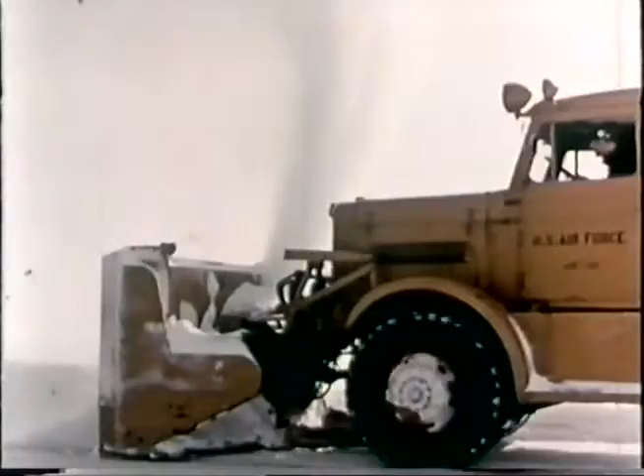Snow. Food for a poet, fun for children, but problems for the aviation industry. Snow falling on the ground at a temperature of 28 degrees or below will pack. Like any dry bulk, loose pack commodity, it can be easily disposed of by shoveling or sweeping. For this reason, the only problem this type of snow presents for airport operations is clearing of runways and terminal areas. However, as the temperature rises, the snow begins to melt.

propeller-driven aircraft have operated from slush-covered runways for years, observing only the necessary additional ground run and, of course, slush freezing in the gear or flaps. After becoming airborne, in an attempt to overcome this latter problem, pilots often recycle gear and flaps once or twice. The attendant problem of additional ground run has not been as acute.

In only one case has the failure of a prop-driven aircraft to attain takeoff velocity been directly traceable to slush, and that was when the slush was reported to be 5 inches deep on the runway. The ability of propeller-driven aircraft to deal with slush is due primarily to prop aircraft having a relatively high thrust-to-weight ratio, a low tire pressure, and a low takeoff speed.

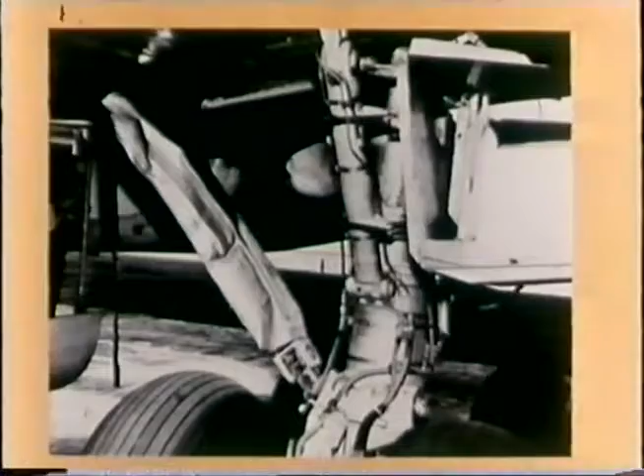The pressing problem is that this ability is unavailable in the operation of jet aircraft. Because a comparatively long ground run is necessary under normal conditions, any increase in the takeoff distance resulting from slush creates a serious problem. Due to an operational incident in March 1959 and evidence of damage to an airline jet transport operating in slush, the Federal Aviation Agency issued a rule that prohibited jet aircraft from taking off on runways with any measurable amount of slush.

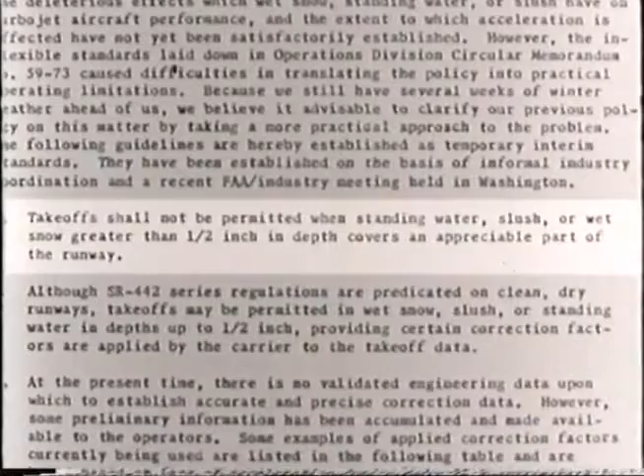A relaxation of this rule was not effected until the results of various tests conducted by the National Aeronautics and Space Administration's Research Center, Langley Field, Virginia, and by a prominent aircraft manufacturer were presented to FAA for consideration. Shortly thereafter, the FAA issued a new rule stating takeoff shall not be permitted when standing water, slush, or wet snow greater than 1/2 inch in depth covers an appreciable part of the runway. This rule is still in effect.

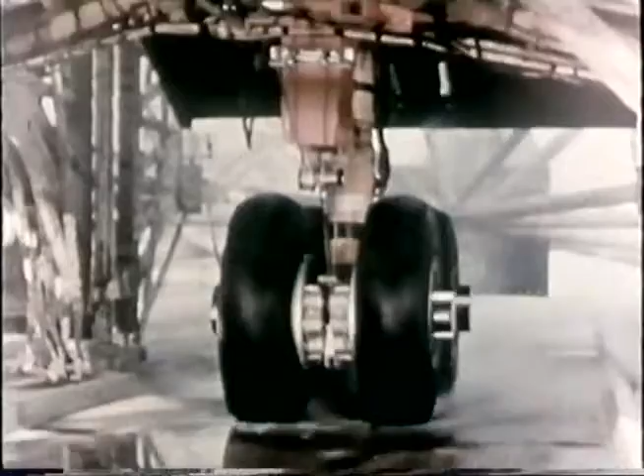Jet aircraft can be excellent revenue producers, but due to high initial cost and operational expenses, they represent a serious loss potential when grounded because of weather conditions. Researchers and engineers at NASA and elsewhere were busy experimenting in an attempt to work out go or no-go formulas for slush operation. These formulas were based on tire width, aircraft weight, slush depth, thrust-to-weight ratio, and takeoff velocities.

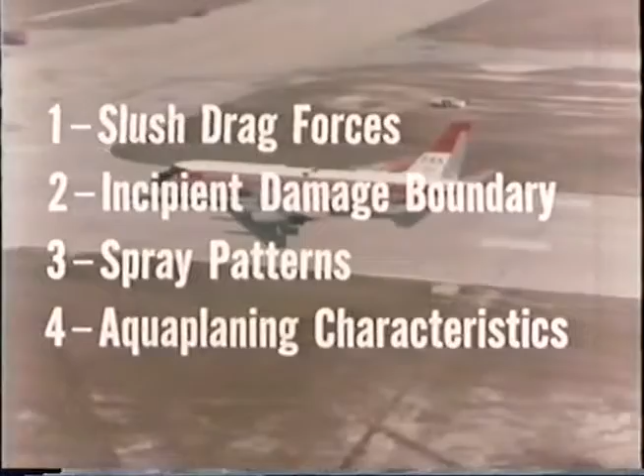What was needed now was a full-scale test program under which conditions could be controlled and measured accurately. The FAA's National Aviation Facilities Experimental Center, located at Atlantic City, New Jersey, was assigned this task. The program was designed to determine the following: slush drag forces, incipient damage boundary, spray patterns, aquaplaning characteristics, all in relation to aircraft velocity and slush depths.

It was felt desirable that a 4-engine jet aircraft, representative of the type being flown in current passenger service, be used in these tests. The program was started with the delivery of a Convair 880M to the FAA. Runway 13-31 was selected for laying test beds of slush 50 feet wide and from 1,000 to 3,000 feet long.

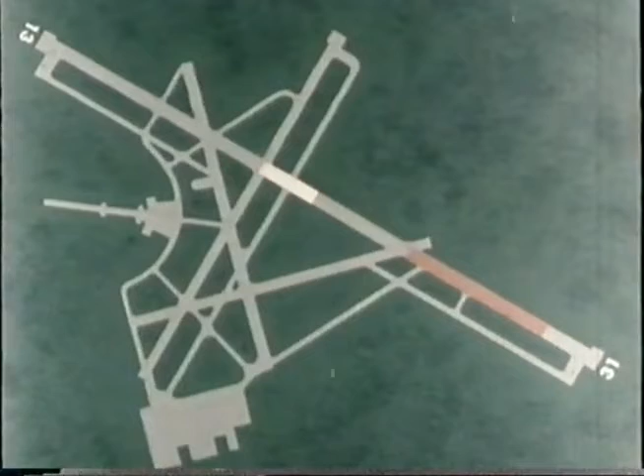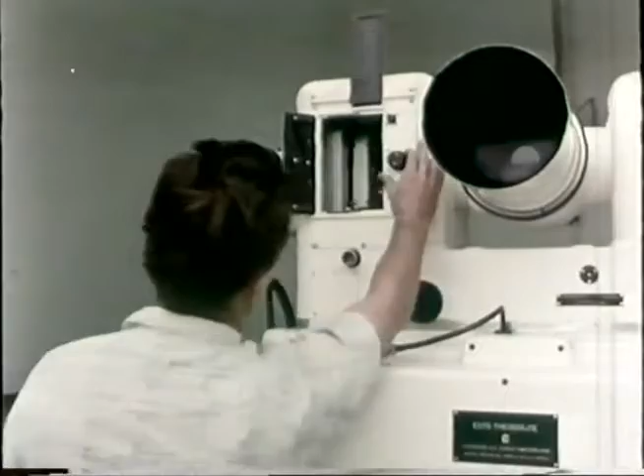This central location was selected to permit enough room for the test aircraft to accelerate, to have enough room for engine spin down to idle thrust, to allow sufficient distance for the aircraft to brake to a stop after exiting the test bed, or to be able to accelerate to a rotational velocity for takeoff. Primary measurements of aircraft position, velocity, positive and negative acceleration, and attitude were obtained by phototheodolite and accelerometer instrumentation.

The first test in slush was scheduled for late September. Ice was delivered to the runway site in the early morning hours in huge insulated trucks.

The amount of ice required for the entire project was 2,300 tons, enough to lay end to end a solid lane of 300-pound cakes 12 miles long. The cost seemed expensive, over $50,000, but not if one considers that the washout of one jet aircraft amounts to $5 million.

While the leveling operations were being conducted on the test bed, preparations were begun on the 880. The aircraft was fueled and towed to the starting position. Towing assured that the combined aircraft weight, including fuel allowance for burn-off, would remain constant at approximately 150,000 pounds.

As the sun came up, the test preparations took on a feverish pitch. The test bed must be leveled and waiting for the sun's warmth to turn the snow ice into slush. As the snow ice was laid, it was leveled much in the same manner as concrete, that is, by scrapers riding on leveling boards. But unlike concrete, the snow ice would not shear easily. Leveling was a tough job.

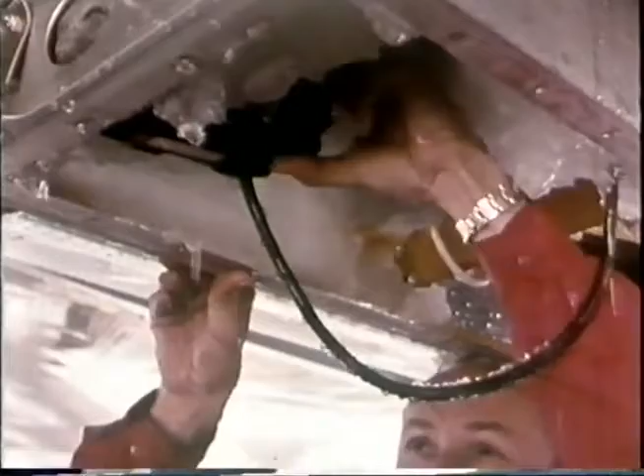A considerable amount of slush was found to have passed through the air conditioning inlet plenum and had accumulated inside the special fabrication designed to house photo instrumentation cameras. Accumulation was relatively light because the tests were conducted in warm weather. The aircraft was warm, the slush bed short.

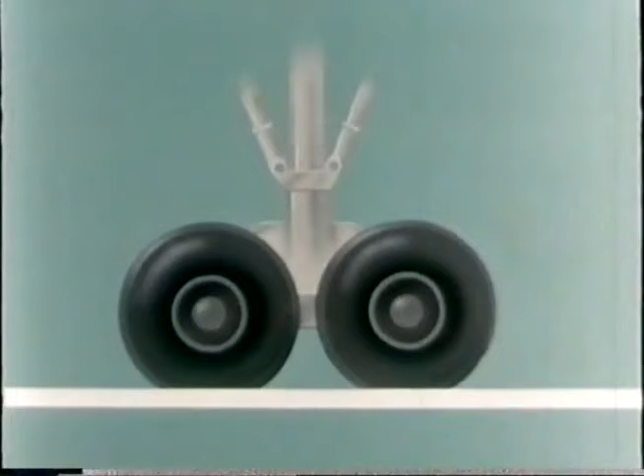Operations on long runs in slush during freezing weather would result in greater accumulation. Slush freezing in flaps and wheel wells during climb to altitude is an additional problem to be considered by the pilot. To understand the problems of slush accumulation and impingement, it is necessary to understand the various spray patterns and behavior of the aircraft wheels.

Three well-defined sprays can be observed from the main wheel bogies. The bow wave, slush spray ahead of the rolling wheel. The side wave, slush spray extending from either side of the tire. The rooster tail, slush spray developed by the interference of the two side waves of the side-by-side wheel configuration.

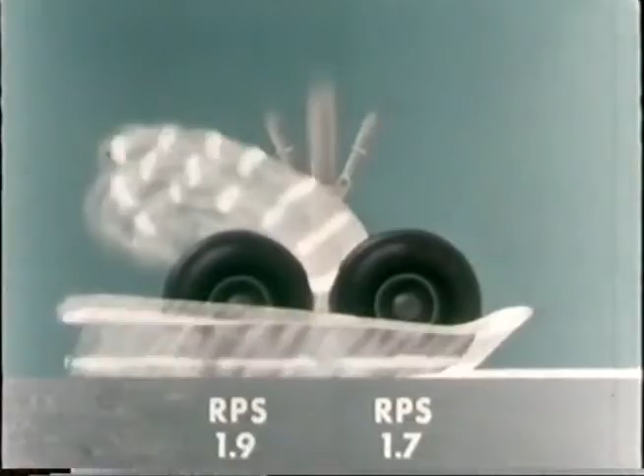We first see the wheels at a speed of 10 knots. Slippage of the forward wheel is noted by the revolutions per second indicated beneath each wheel. At 30 knots, the side wave is growing and moving aft, approaching the vertical. The bow wave moves further forward and increases in height. The rooster tail begins to grow and spread out.

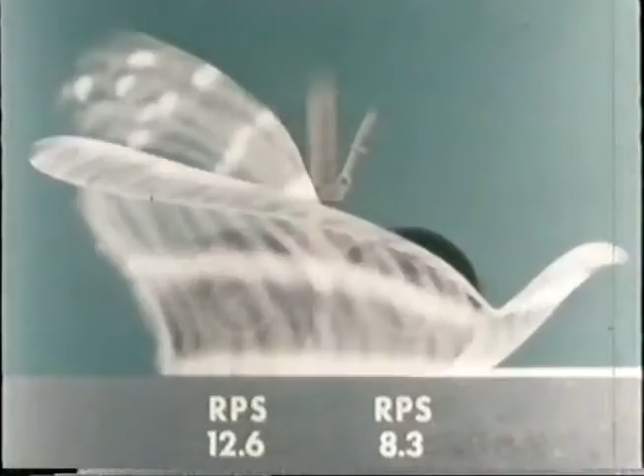At 50 knots, the bow wave begins to separate from the side wave and reaches a maximum height. Also, the relative amount of forward wheel slippage increases. At 80 knots, the side wave moves in a direction slightly aft of the vertical. The separation of the side wave from the bow wave is more distinctly shown.

Increasing to 105 knots, the bow wave extends a maximum distance ahead of the wheel. Here, slippage of the forward wheel is considerable, while the rear wheel rotation is nearly the same as would occur on a dry runway. The rooster tail is now beginning to level off. When the aircraft reaches a ground velocity of approximately 115 knots, the forward wheel no longer contacts the runway surface and aquaplanes on the slush. Considerable forward wheel slippage is still evident.

At 130 knots, the side wave and rooster tail are more shallow, and the direction of the spray almost horizontal. Also note that the forward wheel starts to spin up. At 140 knots, the bow wave completely disappears. The rear wheel becomes readily visible. The forward wheel continues to spin up. When the aircraft reaches a ground velocity of 160 knots, the side wave and rooster tail are extremely shallow, and the forward wheel almost spins up to the rear wheel.

For a runway covered with slush to a depth of 1 inch, the relation of the slush drag force to the ground velocity of the test aircraft is illustrated. As the aircraft increases in velocity, the drag force from slush increases in direct ratio to the square of the velocity.

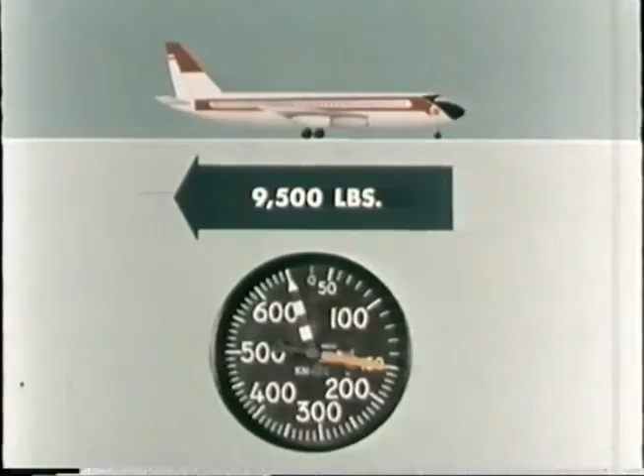However, at speeds above 120 knots, the drag forces decrease. And this decrease is due to the fact that at speeds above 120 knots, the tires aquaplane. This results in a lower drag force from the wheels, as well as the lowering of slush flow and the consequent slush impingement drag. The increase and then decrease in the slush drag force as the velocity increases may be illustrated by the patterns in which the slush sprays from the wheels.

As the aircraft velocity reaches 105 knots, the slush drag force is increasing. Motion picture coverage of a test run at 105 knots shows that the nose wheel, rooster tail, and side wave force a large amount of slush toward the bottom fuselage and Kruger flaps on the leading edge of the wing. The heavy vertical and lateral slush displacement can be easily seen. In later and much higher speed runs, this heavy displacement will be reduced because of aquaplaning.

At this speed, wing root-mounted engines would experience heavy ingestion. Again, the substantial impingement against the inboard wing section and fuselage from the side wave and rooster tail of the nose wheels can be seen. Note that the engines are free of slush ingestion. This aerial shot shows the slush flowing over the wings from the nose wheel spray. Note that the nose wheel side wave does not extend beyond the inboard engine.

As the aircraft accelerates beyond 105 knots, the slush drag force increases to a maximum at approximately 120 knots, but decreases as the aircraft approaches 130 knots. At this velocity, the bow wave is comparatively small. Only a slight amount of slush passes over the wing, although there is considerable underwing and fuselage impingement.

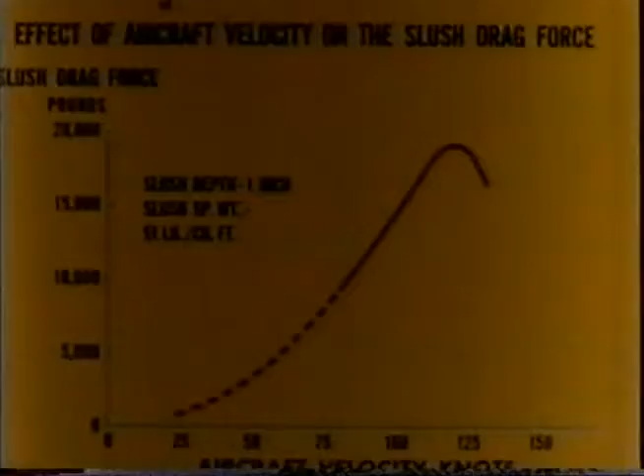As the aircraft speed reaches 140 knots, the slush drag force continues to decrease. The bow wave now completely disappears. The flow of slush is almost horizontal, just reaching the under fuselage and wing. At this speed, the aquaplaning and resultant decrease in slush flow permits the main bogies to become visible to the camera. There is still considerable flow along the fuselage, back to the vertical and horizontal stabilizers. At a speed of 150 knots, the effect of aquaplaning causes further reduction in lateral flow of the slush.

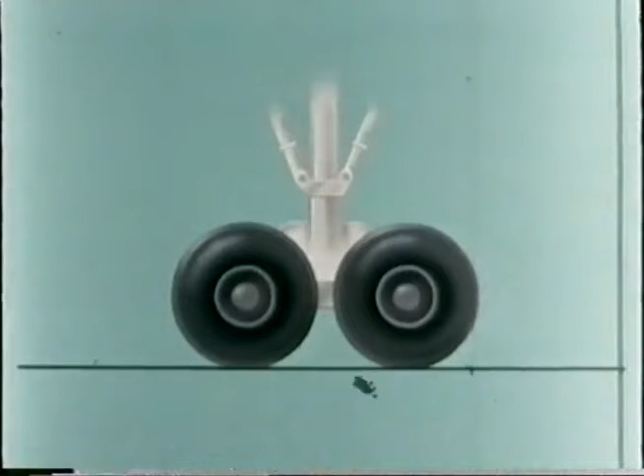Then to another study, the relationship of slush depth to the slush drag force. Results of a test conducted at 110 knots with a slush depth of 3/4 of an inch indicated that the slush drag force was 13,200 pounds, more than the takeoff thrust of one engine. At this depth, the entire airfoil, including the inboard leading edge, is visible, even though the spray from the nose wheels is causing flow over the wing root areas.

Here, only an occasional flow over the Kruger flaps in the inboard wing section is visible. The flow can be described as comparatively light. This view gives the best indication and comparison of slush spray density and resultant drag and impingement values.

As the depth increases to 1 3/8 inches, the slush drag force increases to 22,900 pounds, nearly equivalent to the loss of 2 engines. Spray over the Kruger flaps is seen from the side wave of the nose wheels from coverage of a test under these conditions. The wing area inboard of the engine is still visible, although evidencing considerable increase in the slush flow. Compared to the preceding test at the 3/4 inch depth, spray over the wing is seen to be heavier, as could be expected.

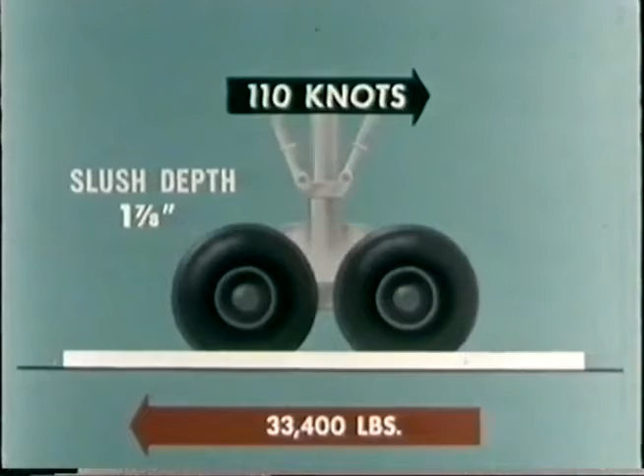As the depth increases to 1 7/8 inches, the slush drag force becomes 33,400 pounds, nearly equivalent to the loss of 3 engines. In this dramatic shot, taken during a test under these conditions, the increased depth is now causing heavy impingement of slush under the fuselage and completely obscuring the wing inboard from the engines.

The engines still show no evidence of slush ingestion. Wing root mounted engines would be exposed to considerable slush ingestion. The main flow toward inboard wing sections and flap areas is created by the nose wheels.

Again note, flap impingement as well as throw over the wing. The density of the spray substantially increases.

In an effort to determine the amount of drag contributed by the nose wheels to the overall drag force, a special test was run at a speed of 105 knots through a slush bed 1 3/8 inches deep. The bed had a slot for the first 500 feet in which the nose wheels ran free of all slush. The results? Approximately 1/3 of the total slush drag is caused by the nose wheels, 2/3 by the main wheels.

These drag forces were almost 3 times that predicted as a result of previous studies for the nose wheels, almost twice that predicted for the main wheels.

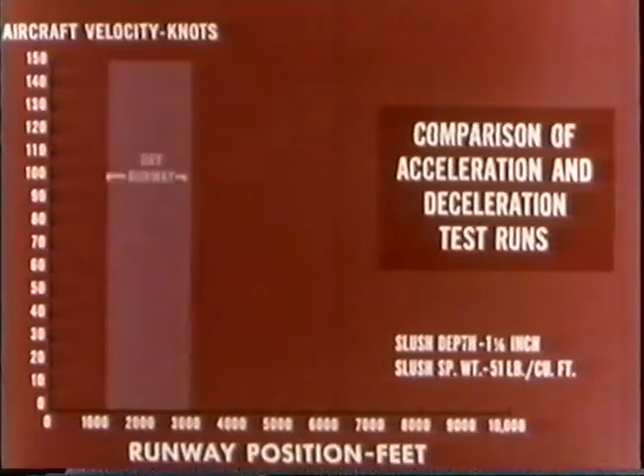Based on the results of test runs at idle power, the relation of velocity to position was predicted for the test aircraft operating at maximum takeoff power in slush 1 1/8 inches deep. Plotting this predicted relationship, allowing distance for acceleration to 100 knots on a dry runway surface before entering a 3,000-foot-long slush bed resulted in the curve shown.

The dots represent the velocity history of an actual power run through the bed under these conditions. This validated the method of testing with engines at idle power, which was much safer and a more accurate procedure than test runs at takeoff power.

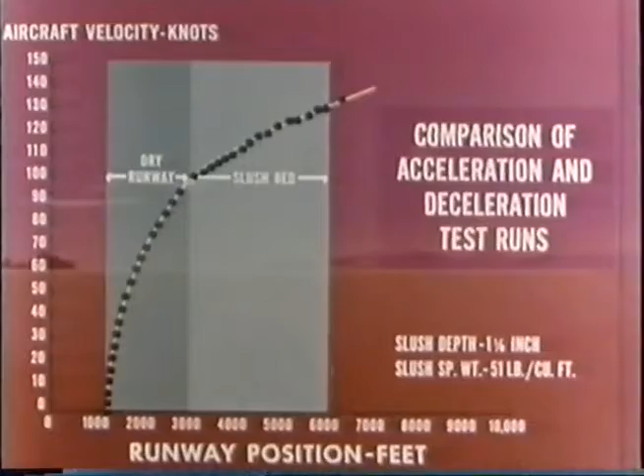How does the additional drag of the slush affect takeoff performance? On a standard day at the test weight of 150,000 pounds, the 880M operating on a dry runway can be expected to reach takeoff velocity in a distance of approximately 3,400 feet. If the runway is covered with a 1/2 inch of slush, the predicted distance increases to 3,975 feet. When the depth of the slush is 1 inch, the distance will increase to 5,000 feet.

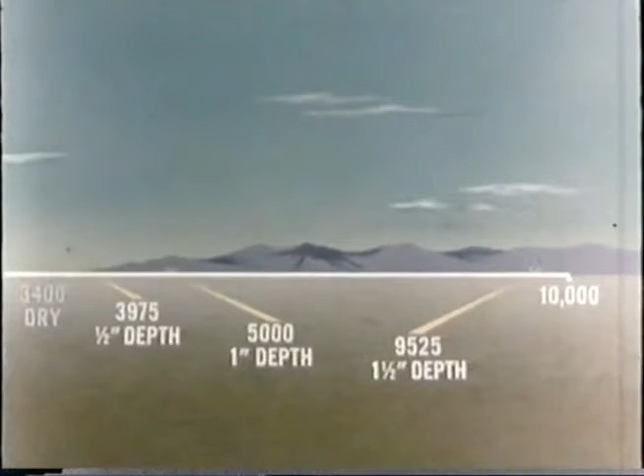When the slush is 1 1/2 inches deep, the distance to reach takeoff velocity will be almost 2 miles, 9,525 feet. This is almost a 200% increase. At a depth of 2 inches, the aircraft cannot accelerate beyond 110 knots. The retarding forces now equal the available thrust. Since this velocity is far below that required for liftoff, no matter what pilot techniques are used, the takeoff distance becomes infinity.

Another problem associated with slush is that of stopping the aircraft if an emergency requires aborting the takeoff. The surface is slippery. At the higher speeds, forward wheels spin down, and the tires are aquaplaning. The result? High-speed braking is almost non-existent. Low-speed braking is greatly reduced. For example, the distance required for stopping the test aircraft from a speed of 100 knots on a runway covered by a half-inch of slush without using reverse thrust is approximately 3 times the dry runway stopping distance.

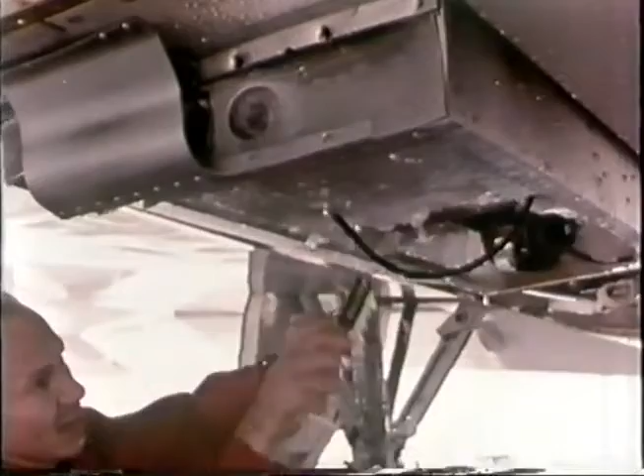This full-scale test program answered many questions concerning the operation of jet transport aircraft from slush-covered runways that previously had either remained unanswered or had been answered by assumptions. We know that the retarding effect of slush can greatly hinder the takeoff performance of jet aircraft. A substantial amount of slush impingement and accumulation is likely to occur. Slush ingestion into wing pod mounted engines is unlikely.

A slush ingestion problem may exist with aft fuselage and wing root mounted engines. The nose wheels contribute a significant portion of slush impingement damage and slush accumulation. Prior methods of predicting the retarding effect of slush were inadequate. Finally, tire aquaplaning in slush reduces the slush drag force.

Results of these tests do not suggest any relaxation in the present FAA rule of prohibiting the operation of jet aircraft in slush at depths greater than a half-inch. It is the Federal Aviation Agency's sincere hope that this intensive slush test program will serve to better acquaint the aviation industry with the potential hazards of slush on jet aircraft performance.